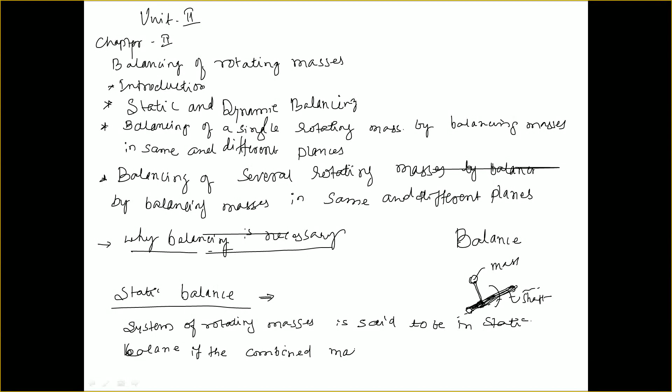So to be in static balance, the combined mass center of the system lies on the axis of rotation.

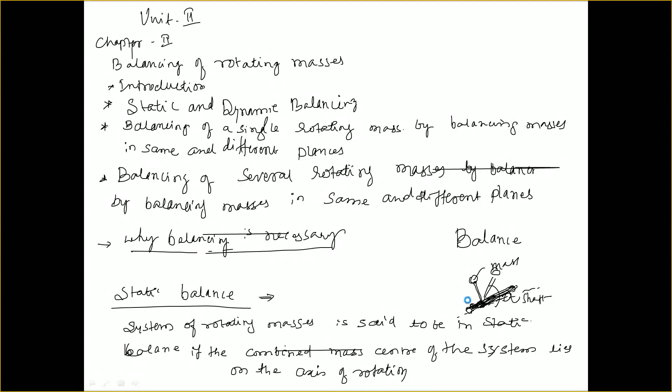That means if you combine the rotating masses on the shaft, their center of the system should lie on the axis of rotation. Then you can call that static balancing. This static balance is related only to the centrifugal forces acting on the component. Now coming to dynamic. The general meaning of dynamic is variation with time. But in dynamic balancing,

when a number of masses are on a shaft or an axis and it is out of balance, you need to bring it to a stable condition. In static, you consider only the centrifugal force and the mass. But in dynamic balancing, you need to consider the centrifugal forces as well as inertia of the masses which affect the rotating member.

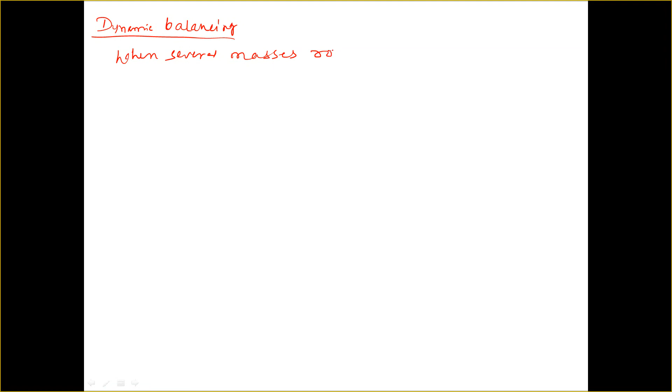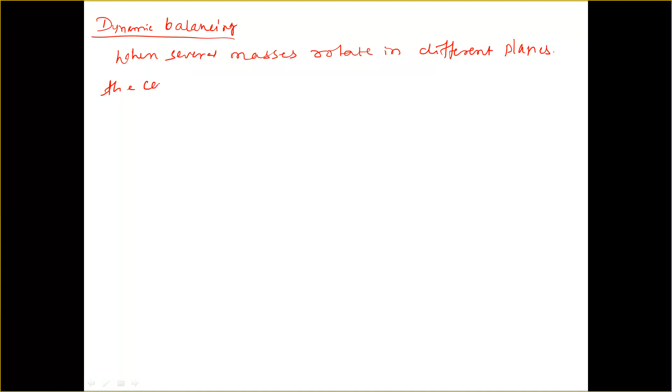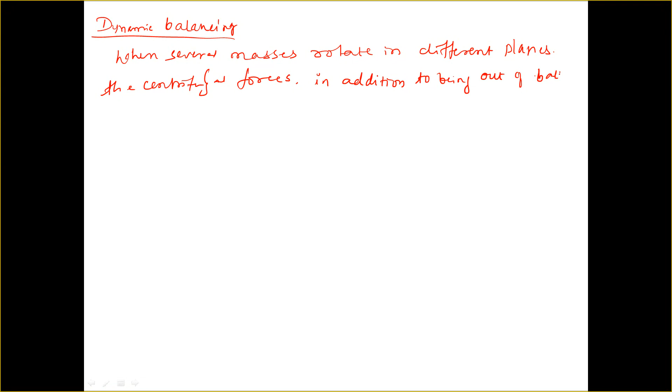In other words, when several masses rotate in different planes, the centrifugal forces, in addition to being out of balance, also form couples.

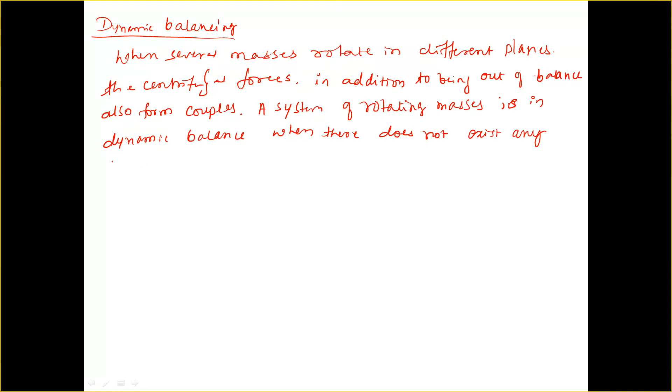Now, a system of rotating masses is in dynamic balance when there does not exist any resultant centrifugal force as well as resultant couple.

This means if the masses are rotating in different planes, not the same plane, then the resultant centrifugal force as well as the resultant couple should be equal to 0; they should not give any value. Then you can say the rotating masses are in a dynamic balancing state.

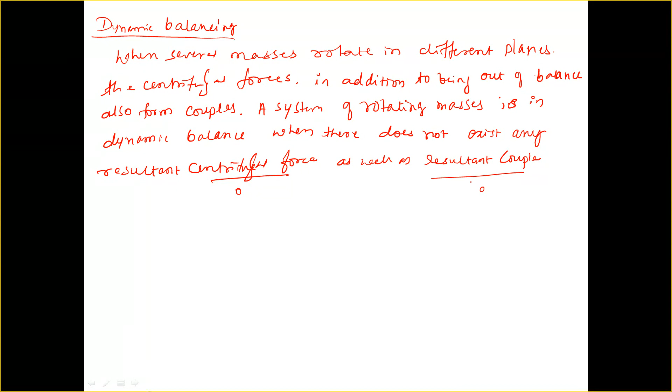Now looking into the balancing of rotating masses, that is a single rotating mass in the same plane. Now let us look here.

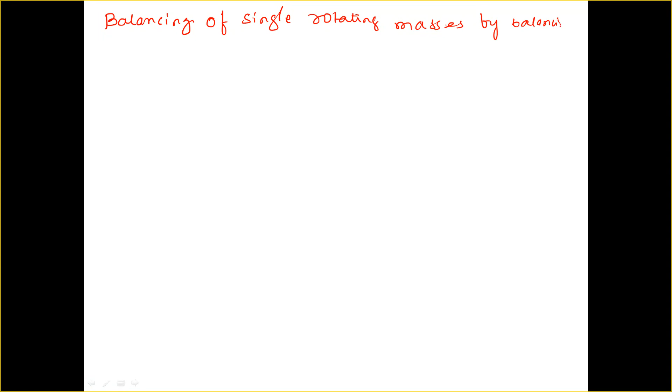Balancing of single rotating masses by balancing masses in same plane. In same plane. So balancing means you need to provide some counteracting force or counteracting mass, so that the obliquity as well as the resultant forces or resultant couples which are going to be induced in the masses should be kept to 0. Okay? So that is what balancing is. Okay? Now,

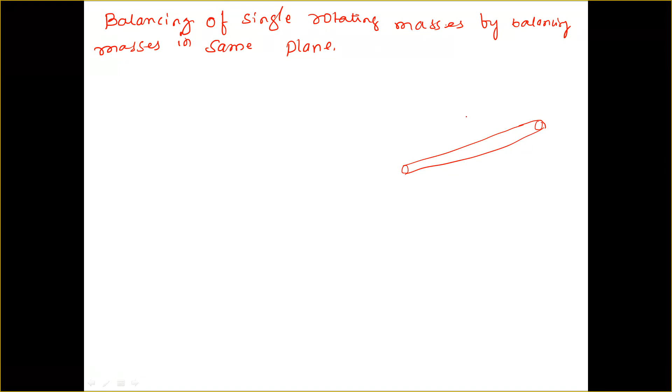this is the first case, balancing of single rotating masses by balancing masses in the same plane. In same plane. Now for analysis, you just consider one shaft here. It is subjected to one mass here, which is held with the help of an arm. So now let us consider it is supported in two bearings here.

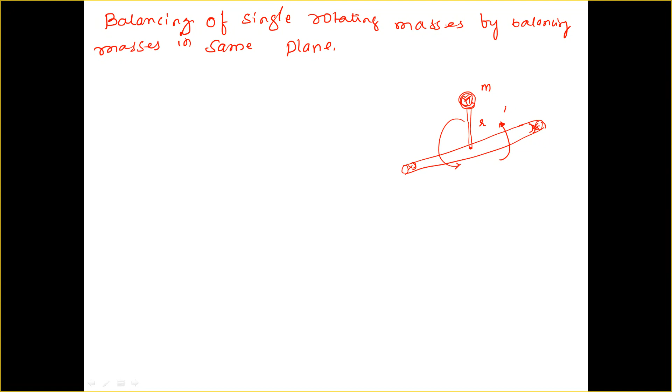Now, if it starts rotating, what happens to this shaft? Now it has a certain mass here, it has a certain radius, and this shaft is subjected to some angular velocity, that is omega. Now what will happen to the shaft? Whether it's going to retain the same position, or it's going to change its position.

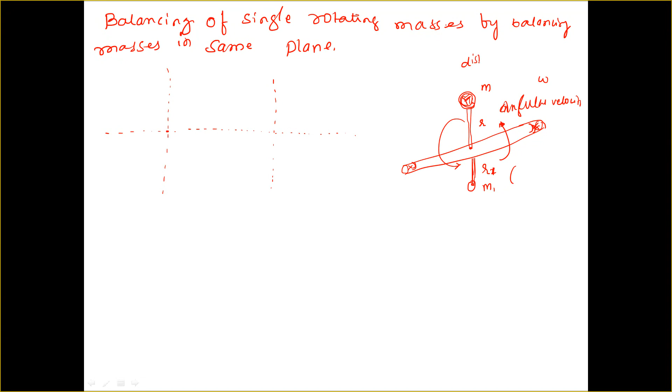Position changes, right? So now to balance this mass, you need to give some counter mass here, or some counterweight, right? So let us take R1, M1 here. So now M is the disturbing mass here. This M1 is the balancing mass, right?

Now let us consider a disturbing mass of M1 attached to the shaft. Now this is mass M, which is rotating at a distance of R1, and let us take a counter mass, M2, which is at a radius of R2. Now this is a side view here. This is M2, R2. This is mass M. Now this is R. Notation should be same. Okay. Right?

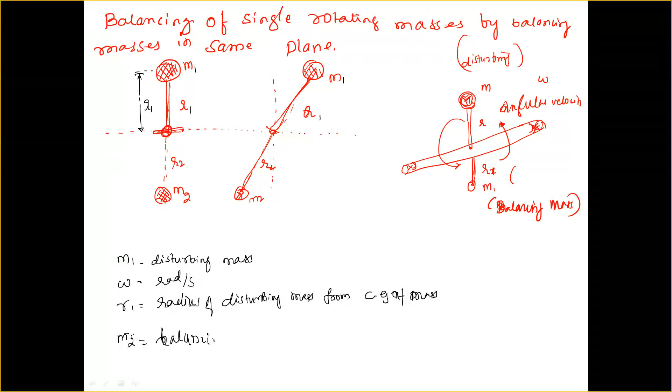We can say radius of disturbing mass from CG of mass, right? Next, similarly, to overcome this effect, you can consider the balancing mass M2. So M2 is the balancing mass. R2 is the radius of balancing mass, from CG of mass to axis of rotation.

So if any component is rotating outside the axis of rotation, what is it going to produce? Already we came across this in governors. Now, as it starts rotating with some angular velocity, it is going to produce centrifugal force. Now let us note down the centrifugal force by the disturbing mass.

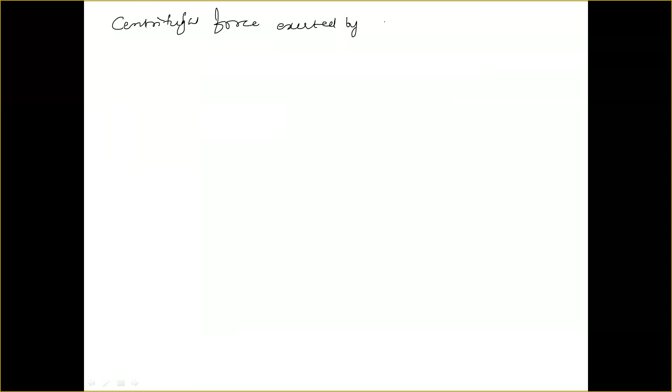Now, centrifugal force exerted by the disturbing mass M1 on the shaft: Fc1 equal to M1 omega square into R1. Let us note this as equation number 1. Similarly, as you want to counteract the centrifugal force exerted by this disturbing mass, you are adding one more mass, that is a balancing mass M2.

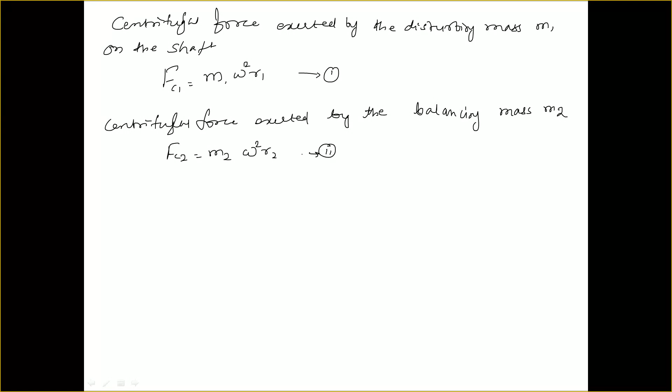So now let us note down centrifugal force exerted by the balancing mass M2: Fc2 equal to M2 omega square R2. Now what is the condition here? To get a balance, the summation of centrifugal forces acting on the shaft should be equal to 0, or the centrifugal force exerted by the disturbing mass should be equal to the centrifugal force exerted by the balancing mass.

Now let us equate equation 1 and 2. What will we get? Fc1 equal to Fc2. Now let us substitute here m1 omega square into r1 equal to m2 omega square into r2. What will we get? m1 r1 equal to m2 r2. Now m1 r1 is a product entirely related to which mass?

Disturbing mass. Okay, so now you can't change it. You can't change it. Now, you may split this product in a convenient way, such that M2 should be kept lower value or lesser than the disturbing mass M1 here. Okay, so now you can go for larger radii. You can go for larger radii, right?

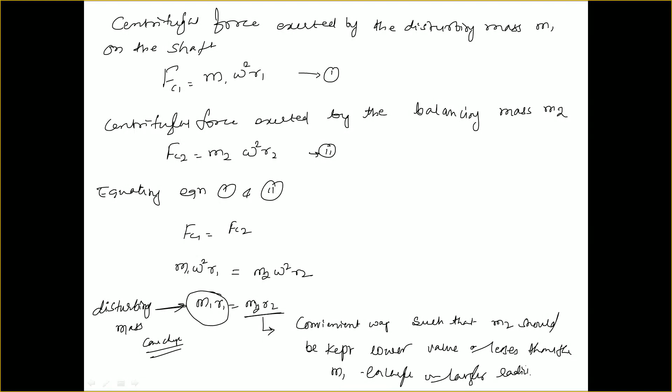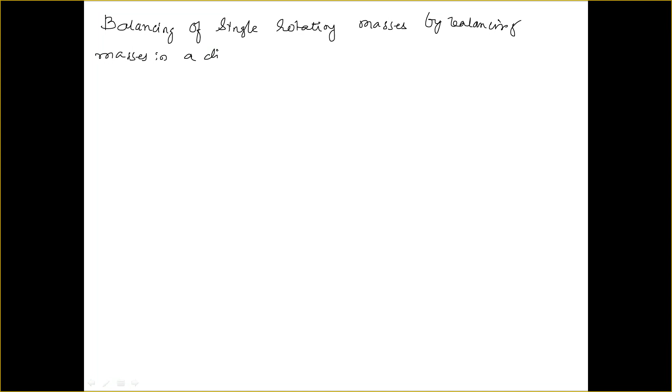This is how we are going to balance single rotating masses in a same plane. Okay. Now let us go for the next bit. That is balancing of single rotating masses by balancing masses in a different plane. Now, why is it necessary to go for balancing masses in a different plane? Why can't you go for the same plane? Can anyone give the idea?

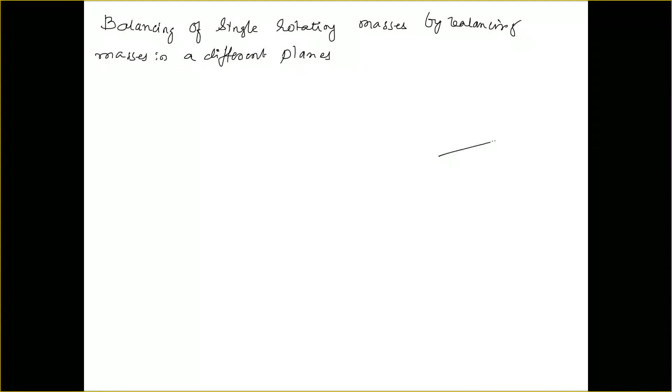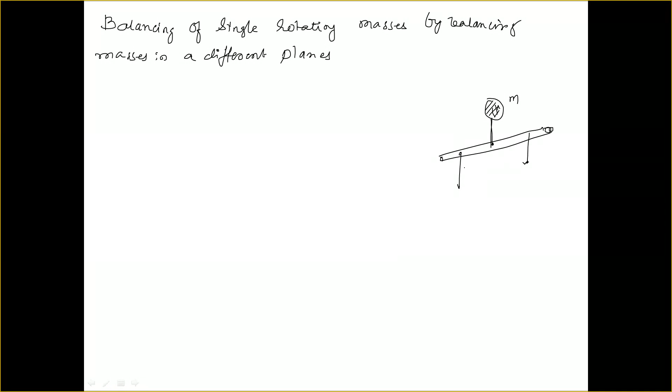So to overcome this, you may put two balancing masses in different planes. You can go for two, or a number of balancing masses, depending on requirement. Therefore, to put the system in complete balance, we consider two balancing masses placed in two different planes. This is one shaft, supported at two end points. This is the disturbing mass. I place one mass on this plane and one mass on this plane. They are on different planes, offset some distance.

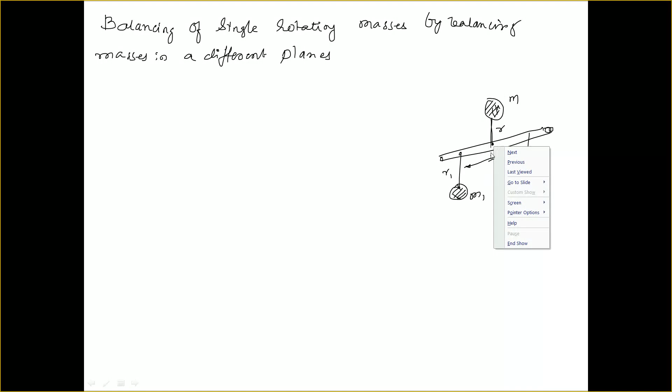Let us take this as m1 and this as m2. Radius of rotation r2 here, r1 here, and r here. Then the offset distances from the disturbing mass, you can give notations L1, L2, L. By this way you can reduce the rocking of the shaft because of the couple induced from the masses on a same plane.

Now to get this, they need to satisfy two conditions of equilibrium. One: the net dynamic force acting on the shaft should be equal to 0. This requires that the line of action of the three centrifugal forces must be the same. In other words, the center of mass of the entire system must lie on the axis of rotation. This condition is static balancing.

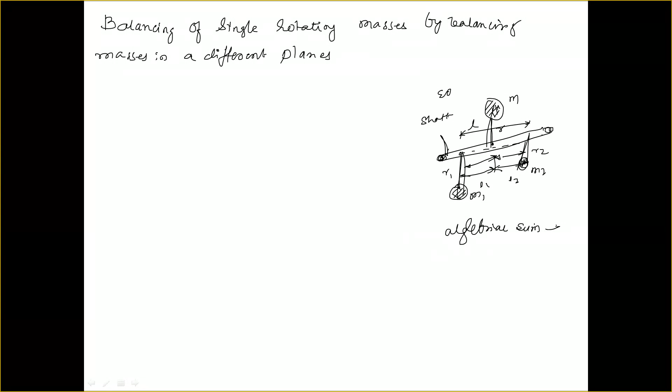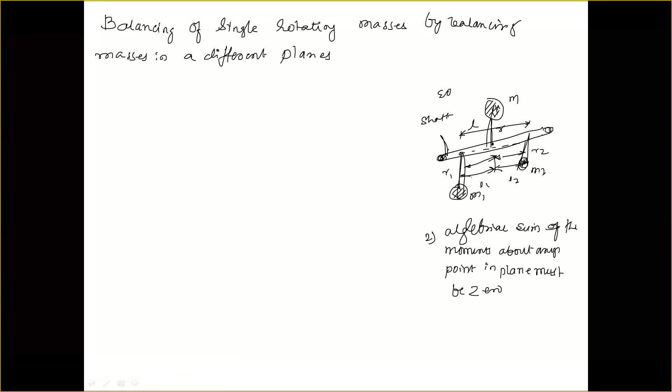Second condition: the net couple due to the dynamic forces acting on the shaft is equal to 0. In other words, the algebraic sum of moments about any point in the plane must be 0. This is the second condition. Now just look here. The disturbing mass is in one plane, mass m2 is in another plane, and mass m1 is in another plane.

Now the algebraic summation of the moments about any point, let us take a moment about this point. If we take moments about this point for these forces, it should be equal to 0. Only then you get the rotating masses in dynamic balance. Now to get this, you have two possible conditions. Let us note down the first condition.

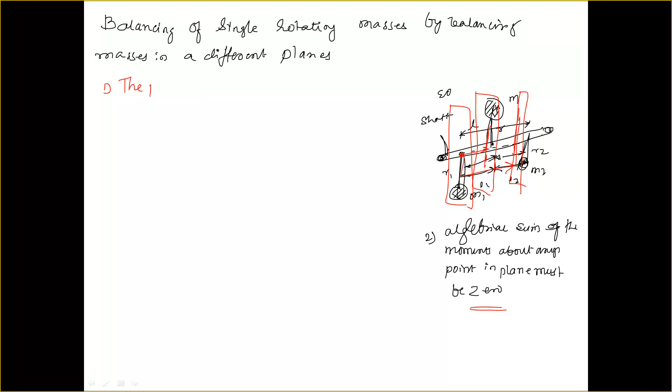The plane of the disturbing mass may be between the two planes of the balancing masses.

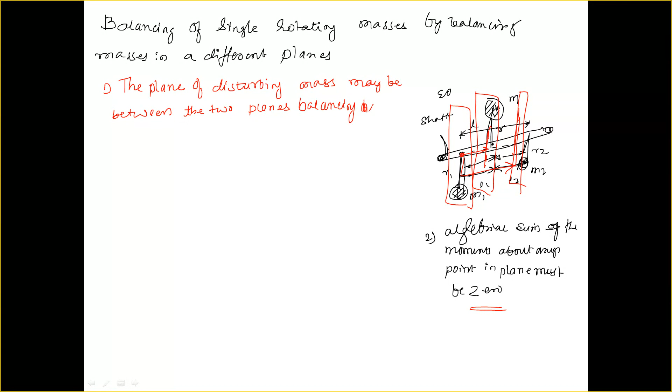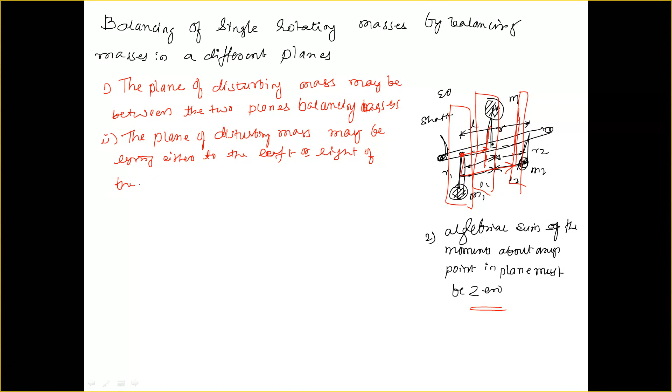Okay, this is one condition. And second condition is the plane of disturbing mass may be lying either to the left or right of the planes of balancing masses.

So we can get two conditions here. One is placing the disturbing mass between the planes of balancing masses, or one more condition is placing the disturbing mass plane either to the left hand side or to the right hand side of the balancing masses. Okay, now let us go for first case.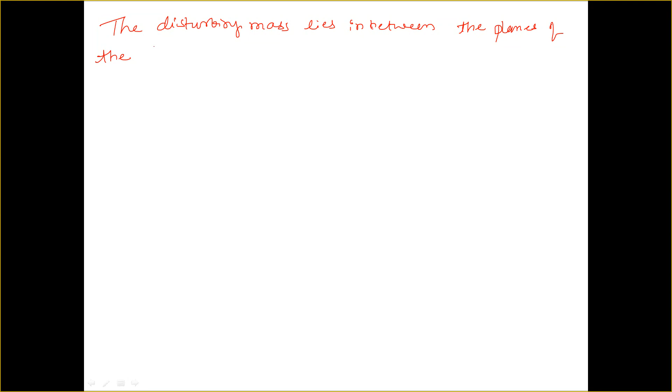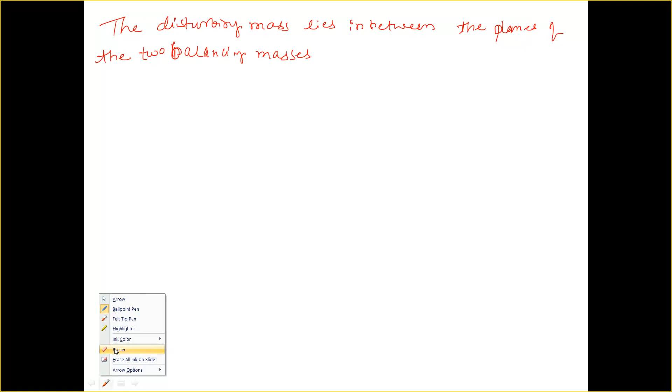The disturbing mass lies in between the planes of the two balancing masses. Okay. So note on this figure.

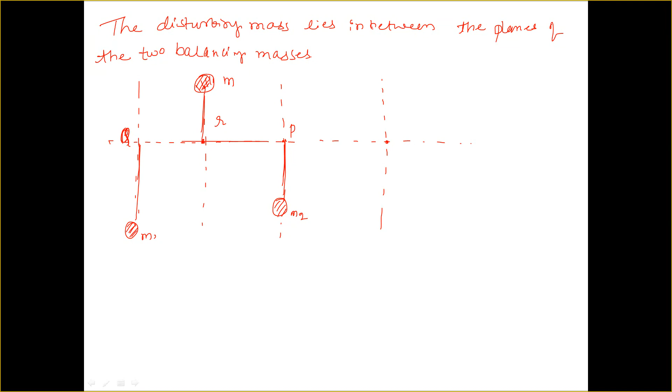So now let us consider m is the disturbing mass, which is rotating at a radius of r from the axis of rotation of the shaft. Now we have two balancing masses here, m1, which is supported at a point q, and one more balancing mass, m2, which is supported at a point p, which has a radius of rotation of r2. Okay.

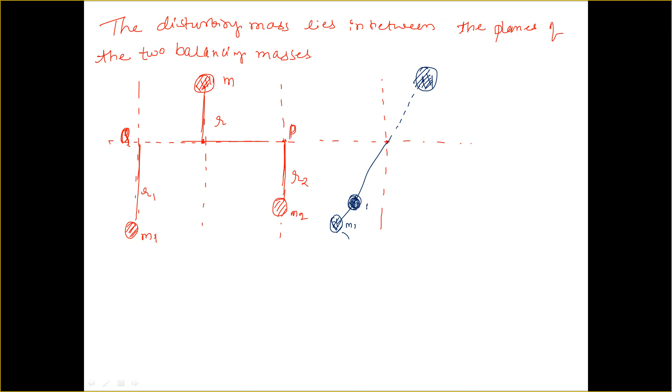Now this is m1, m2, m, this is the radius r. This is the radius r1. This is radius r2. Now this is the axis of rotation. Now let us mark the position of balancing masses as well as disturbing masses with some plane names here: A, M, and L. A is the plane of rotation of disturbing mass. M is the plane of rotation of mass M2. L is the plane of rotation of mass M1.

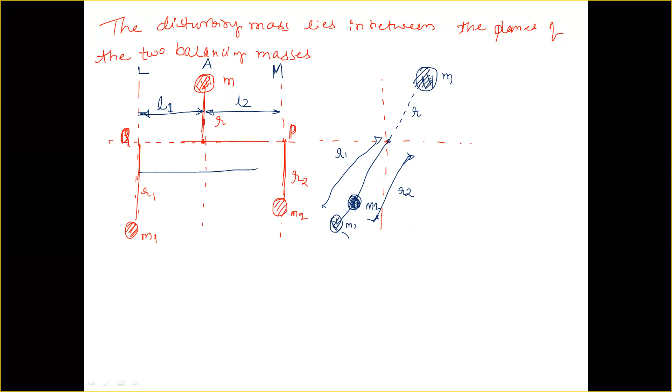Now let us consider the distances. Let us consider L1 is the distance of rotating mass M1 and M, that is the distance between planes L and A. Similarly, L2 is the distance between the disturbing mass and rotating mass M2. And let us take L is the overall distance between the planes M and L, that is rotating mass M1 and M2.

Now, first you need to satisfy the static balancing. That means the summation of the centrifugal forces acting on the shaft should be equal to 0. Now let us go for the derivation. Centrifugal force exerted by the disturbing mass M in plane A: Fc equal to M omega square into R.

Similarly, the centrifugal force due to the balancing masses M1 and M2 in L plane as well as in M plane: Fc1 equal to M1 omega square into R1 and Fc2 equal to M2 omega square into R2. The condition is summation of the forces acting on the shaft should be equal to 0. So Fc1 plus Fc2 equal to Fc, or Fc plus Fc1 plus Fc2 equal to 0. This is the condition for static balancing.

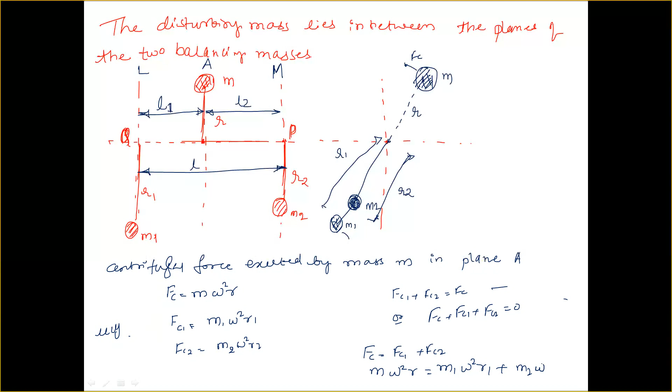Now if you substitute the equations of Fc, Fc1, Fc2 in above equation: M omega square R equal to M1 omega square R1 plus M2 omega square R2. As angular velocity remains the same for the disturbing mass and balancing masses, omega square gets cancelled. Now what remains is MR equal to M1 R1 plus M2 R2. This is one equation.

Now, as you need to find out the magnitudes of balancing masses M1 and M2, you need to consider the moments about the position of the balancing masses. Let us go for first one: to find the magnitude of balancing force in the plane L, that is M1.

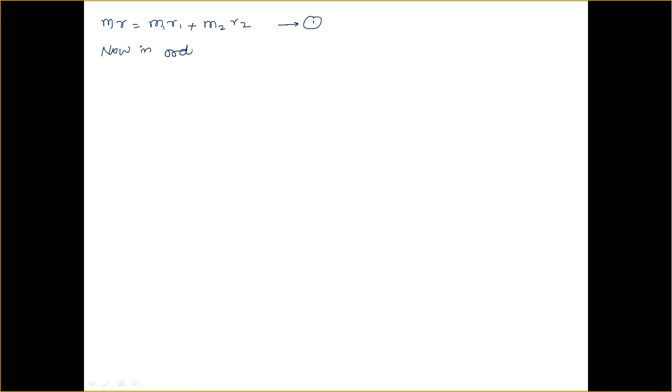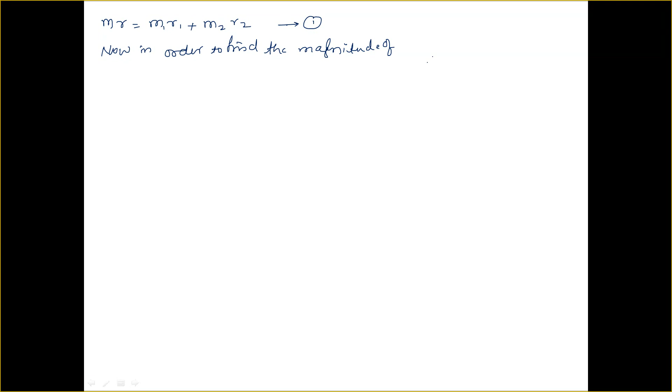Next, in order to find the magnitude of balancing forces in plane L, just recall from your strength of materials: if you want to find out the reaction force at L, or at P, what you are going to do?

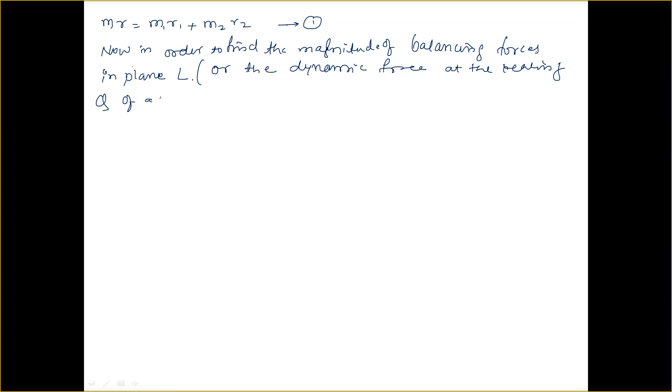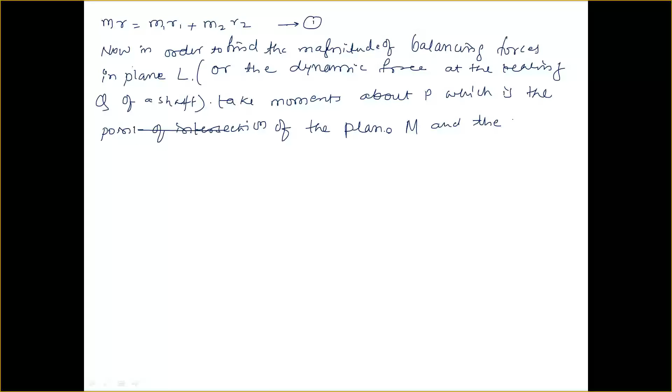Okay. Now you are taking moment about P. Now what is the equation you are going to get here? Someone give the equation. Taking which one? Okay. Now you're taking moment about the point P here. Now we'll draw the diagram here. Now you're taking a moment about this point.

Now here we have an Fc here. Now you have a Fc1 here. Now the distance here is L, and distance here is what? L2, right? Now what will we get? Fc1 into L equal to Fc into L2. Now substitute the Fc1 equation and Fc equation.

Fc1 equal to M1 omega square R1 L. Fc equal to M omega square R into L2. Now omega square gets cancelled here. Now you can find out the mass as well as the product of radius of rotation by this relation. Now this is the second equation.

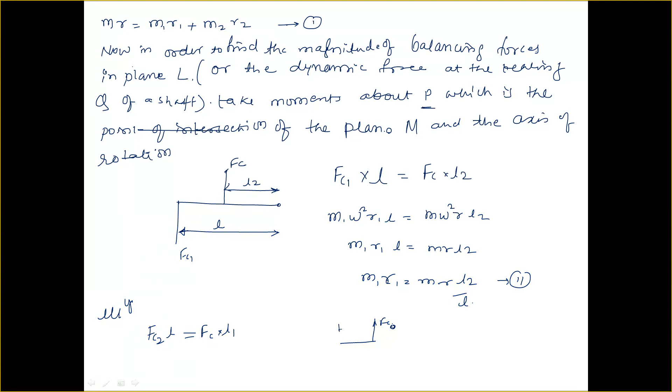Similarly, to find the magnitude of balancing force which is there in plane M, take moments about Q and write the equation. So what you'll get? Fc2 into L equal to Fc into L1. You will get this way. See, this distance is L1. Yes, so this distance is L.

Now again you substitute the equations here. So Fc2 equal to M2 omega square R2 L, equal to M omega square R into L1. Now what will we get? M2 R2 equal to M R L1 divided by L. Now this is the third equation.

So now here equation 1 satisfies the static balancing of the rotating mass. Equations 2 and 3 will satisfy the dynamic balancing status. You can just recall the definitions of static balancing as well as dynamic balancing.

Now, next criteria: plane of the disturbing mass lies on one end of the planes of balancing masses. Now, in this case, what happens? The disturbing mass is either to the left hand side or right of the planes of balancing masses.

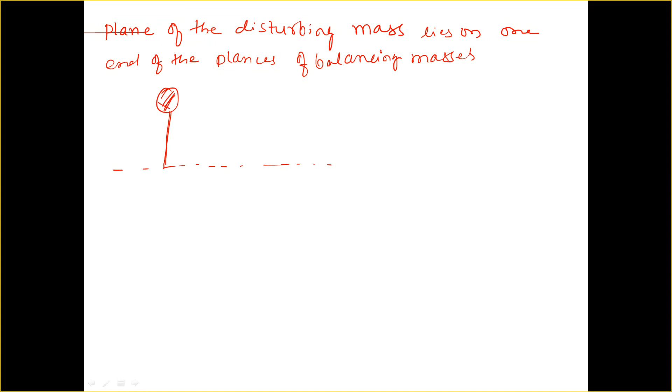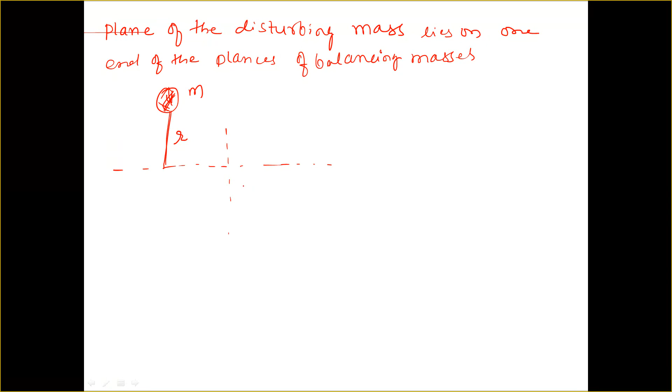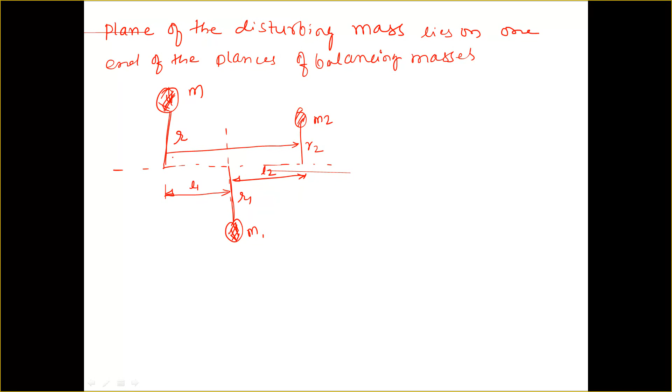Now let us note down one more diagram for this case. Let us take M is the mass which is at a radius of R. Now I kept masses here. This is mass M1 at radius R1, mass M2 at radius R2. Let us notify the distance between every plane: this is L1, this is L2, this overall distance as L. Let us take this is the A plane, this is the L plane, and this one is the M plane.

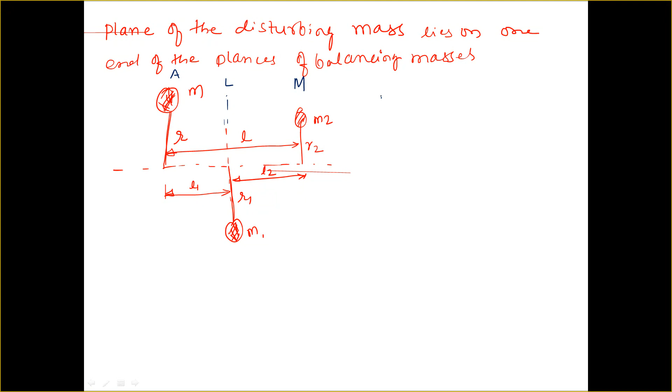Now you just observe here the forces acting in downward direction as well as in upward direction. Downward forces and upward forces summation should be equal to 0. First let us satisfy the static balancing condition. Fc is the force exerted by the disturbing mass, equal to M omega square R. Fc1, force exerted by the rotating mass 1. Fc2, centrifugal force exerted by the rotating mass 2.

So if you look over the condition here, Fc plus Fc2 equal to Fc1. Two forces are acting in upward direction, one force is acting in a downward direction. Summation should be equal to 0. Now let us substitute the relations: M omega square R plus M2 omega square R2 equals M1 omega square R1. What will we get? MR plus M2 R2 equal to M1 R1.

Now similarly, to find the balancing force in the plane L, take moment about point P here, point P and Q. Now Q comes here.

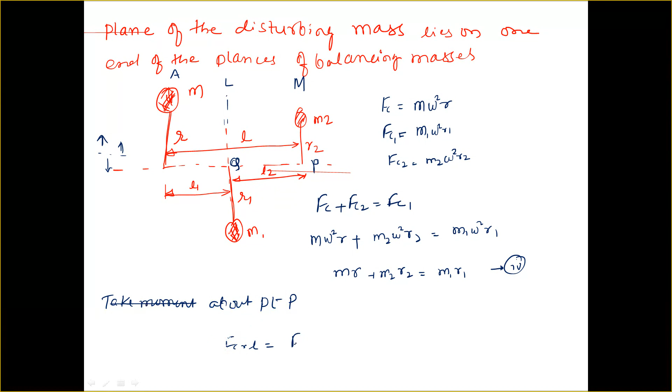Okay, now let us take moment about point P. What will we get? Fc into L equal to Fc1 into L2. Let us say Fc into L equal to, okay, right?

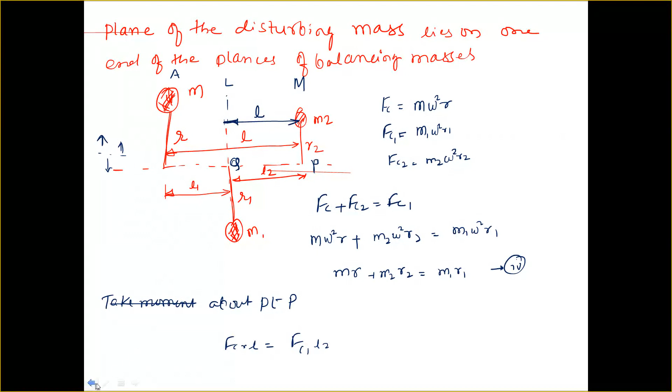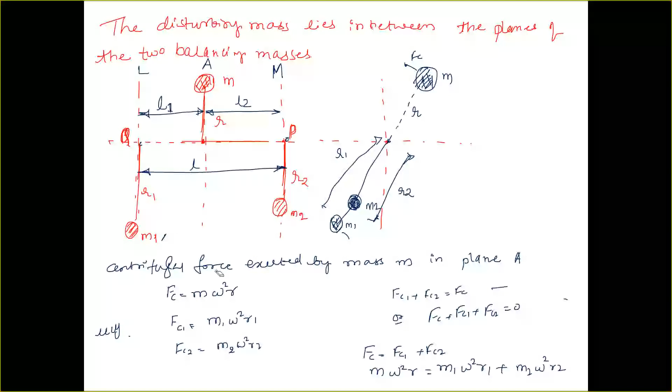You may get some confusion over the notations here, so you better use the same notation which you used for this case also. Okay. Now what is the notation you use between the plane L and M here? It is L. Now this will come L here. Let us go in the previous derivation manner. Where has it gone?

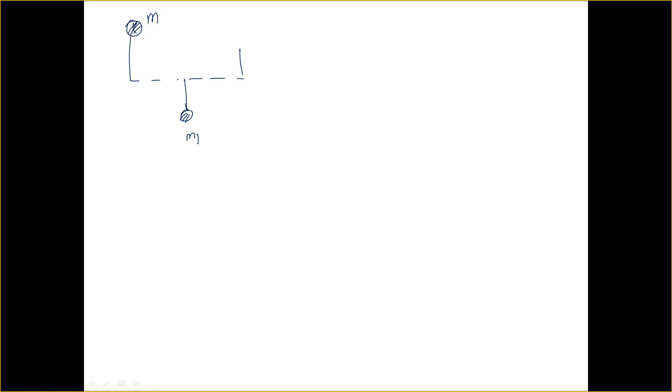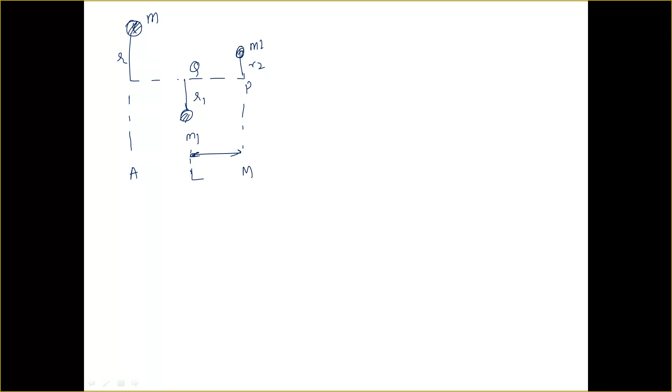Okay, quickly note the second case. So now this is mass M. This is M1. This is M2, R2, R1, R. This point is Q, this point is P. Now this is plane A, this is plane L, this is plane M. Okay. So now the distance between plane L and M is small l. From M to A, it is L2. From L to A, it is L1.

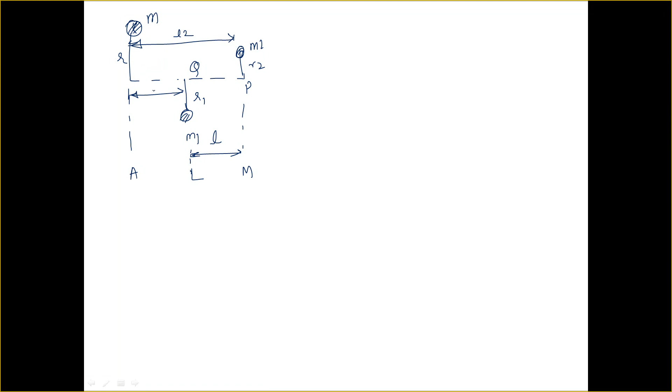Okay. So I've already written the forces here. So Fc equal to m omega square r. Fc1 equal to m1 omega square r1, Fc2 equal to m2 omega square r2. Now if you substitute for the static equilibrium state, what is the condition here? Fc plus Fc2 should be equal to Fc1: m omega square r plus m2 omega square r2 equal to m1 omega square r1, so mr plus m2 r2 equal to m1 r1. Okay. Now this is going to satisfy the static equilibrium condition.

So now in order to find out the magnitude of m1 and m2, let us take a moment about point P here. Taking moments about point P, what will we get? So Fc1 into L equal to Fc into L. Sorry, Fc into L2. Okay? Fc into L2. Just look over the distances here. Now here the distance is L2. Now this distance is L.

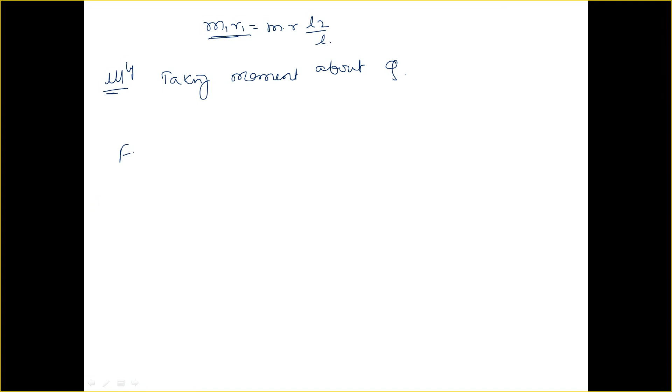taking moment about Q. Okay. So what will we get in this case? Fc into L1 equal to Fc2 into L. Now let us substitute m omega square r L1 equal to m2 omega square r2 into L. So now m2 r2 equal to mr L1 divided by L. This is another equation. So now these two equations are going to satisfy the dynamic equation.

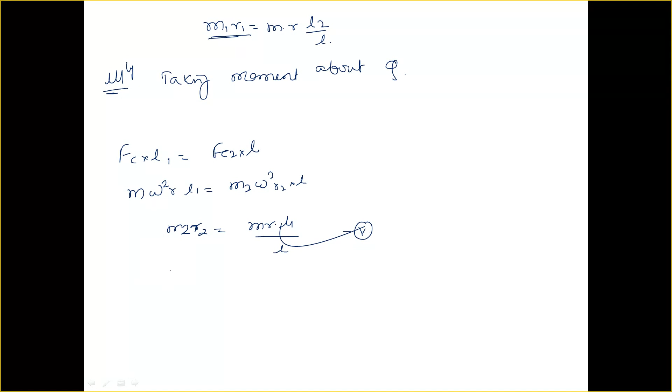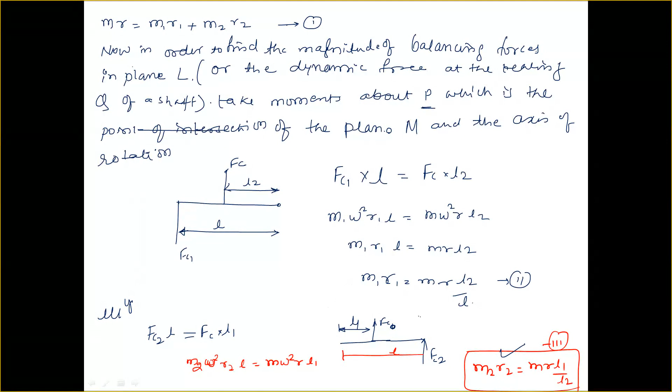Now you can just observe here, even if you alter the planes here, you just observe this equation, you got the same equation here. Similarly, you got the same equation here for balancing mass M1. Okay. Now keep in mind, clearly observe the positions of the rotating mass and the disturbing mass. Then based on that, you can write the equations of moment in your own way, and you can find out the product of mass into radial distances. Then you can split up that product in accordance with your requirement.